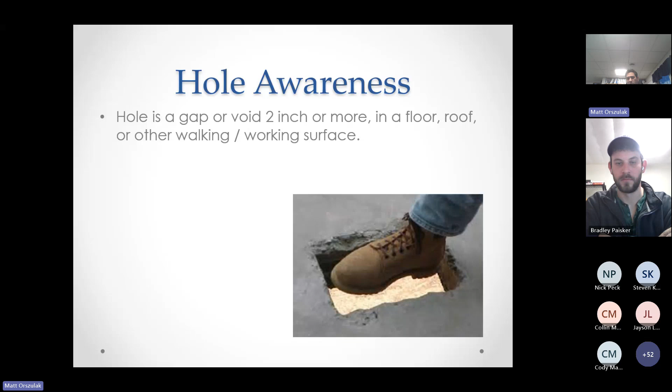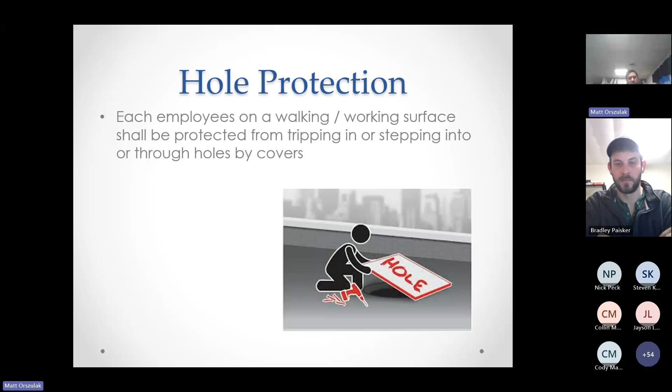So hole protection: each employee on a walking or working surface shall be protected from tripping in or stepping into holes by covers. The easiest thing to do is use a traffic sign, a piece of plywood, some planking, whatever it may be, to protect that hole, and write on it so individuals know there is no hard surface underneath. Usually it's a type of wood that's being used to protect it, and sometimes we use steel plates as well.

Our safe work practices and how we want to cover this moving forward is to cover these things as soon as they're created, clearly identified by spray paint - 'hole' or 'cover' - or it can be verbal if the site is small and can be controlled. But especially if it's a multi-employer job site where there's a lot of different people around, clearly identify in those situations.

Use materials that support twice the weight of the load. We don't want to use really small, random dunnage, say a piece of plywood that's extremely been used and abused and has a lot of cracking in it - we don't want to use that. We want to make sure that it's the right type of lumber that can support twice the load that we might be putting on it.

We want to make sure it's somewhat secure. It doesn't have to be fastened into concrete or anything like that, but it needs to be able to make sure it doesn't easily get moved by anyone walking or moving around it, which could then open up that hole for a potential fall hazard or trip hazard. And again, best line is just that communication with our safe work practices that we just talked about in our JHA.

Each and every morning... We did have a pretty bad incident, probably about 4 years ago, where it was a slab penetration on a control house, I think it was in Barre, where we knew about it. We were just moving the plywood because we had to do some more work inside that penetration, and the individual picked up the 2x4 or the piece of plywood and stepped right in the hole. It was about a 3-foot drop, and created a big knee sprain.

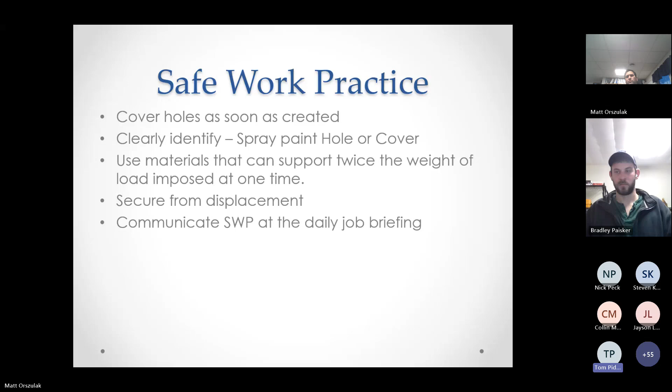The only thing I'd add is even if it's just a trip hazard, alleviate it sooner than later. One place I think about that is the decks on trailers and stuff like that. So if you see a hole in a deck on a trailer, not only is that a DMV issue, but it's also a trip hazard and could be a fall hazard.

Yeah, we're going to be doing a little bit more residential construction. We'll probably have some fall hazards and hole hazards when we do that type of work.

All right, I'm going to switch screens here. Everybody see the meeting? Blow it up a little bit. See that? Yep.

So yeah, safety topic: hazard recognition and protection of open holes.

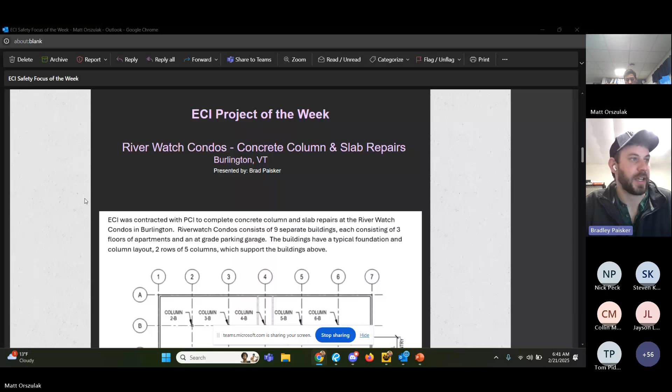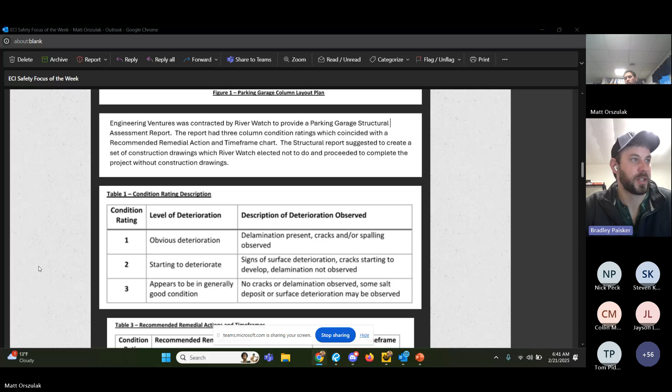Engineering Ventures was contracted by Riverwatch to provide a parking garage structural assessment report. The report had 3 column condition ratings, which coincided with a recommended remedial action and timeframe chart. The structural report suggested creating a set of construction drawings, which Riverwatch elected not to do, and proceeded to complete the project without construction drawings.

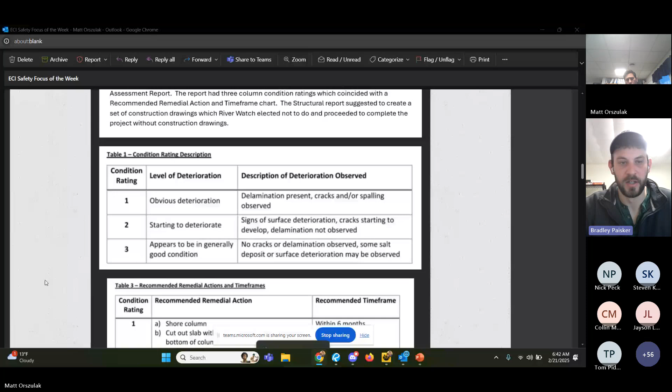The 3 condition ratings were: 1, obvious deterioration, basically spalling, cracked out concrete. Condition 2 was starting to deteriorate, generally cracks or some aggressive salt deterioration at the base of the columns. Number 3 was generally good condition, which just required pressure washing and silane application.

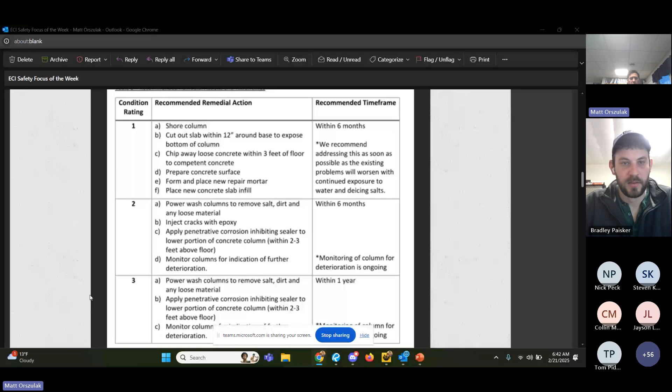Do you want to go through these condition ratings or want me to scroll down? I think we can skip that if somebody wants, it'll be obvious in the next slides what we had.

The project quantity was condition 1: 57 columns, condition 2: 11 columns, condition 3: 9 columns. Condition 1 columns required the most work, including removal of a portion of slab around the column and chipping bad concrete at the column down to rebar.

ECI mobilized in early December to begin repairs in Garage 1 and quickly found the columns had a very narrow rebar cage and subsequently a slender section of concrete left after the Class 1 chipping work. At this time, ECI informed the owner that a shoring system would be required to support the structure during repairs.

The owner engaged Artisan Engineering to do a shoring plan. The columns initially were 10 inches by 14 inches, and the rebar had 2 inches or more of cover, so it really didn't leave much concrete after we chipped.

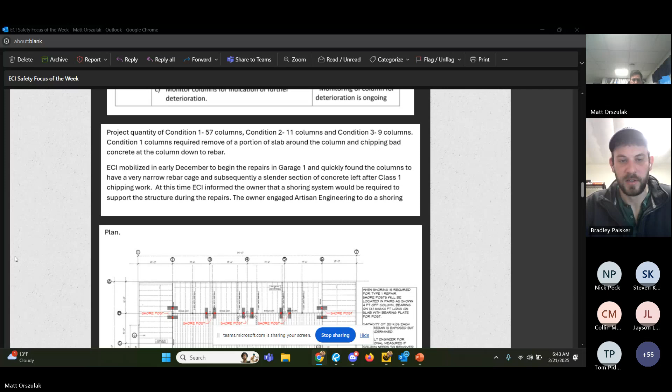This is the shoring plan that Artisan gave us, basically a shoring column resting on 4 6x6s, supporting the structural beams that were inside the sheetrock ceiling.

This is the repair detail that Artisan also provided, including some 2-inch expanded rigid insulation for frost protection. Then we infilled with the Sika Quick that I'll go over in a minute.

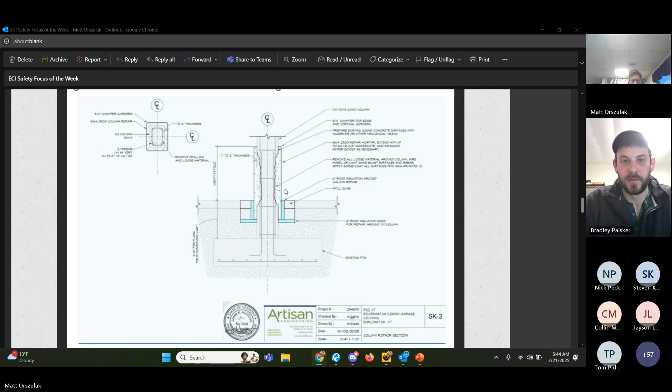ECI rented aluminum shoring posts and followed the plan for the shoring system. Unfortunately for the owner, this nearly doubled the cost of the project. However, given the high risk to ECI's employees, building residents, and the buildings themselves, we made the right decision. Credit to the crew for recognizing the extreme hazard and differing conditions in a timely fashion.

The general sequence of work included identifying how high the column needed to be repaired, saw cutting the slabs and column, hand excavating the subgrade to depth, chipping bad concrete down to the rebar cage, cleaning up the rebar, applying a corrosion inhibiting bonding agent, forming the column overpour, pouring the repair material, which was a bagged Sika Quick 2500 with 3/8 stone, stripping the forms, and finally pouring the slabs with the same repair materials.

A major factor of the work was scheduling residents to vacate the garages in a timely manner and creating an overlap between garages to keep a steady workflow between activities while having a warm location to temper substrates and materials. A hybrid crew of heavy civil, rail, and concrete workers all worked together to tackle this project.

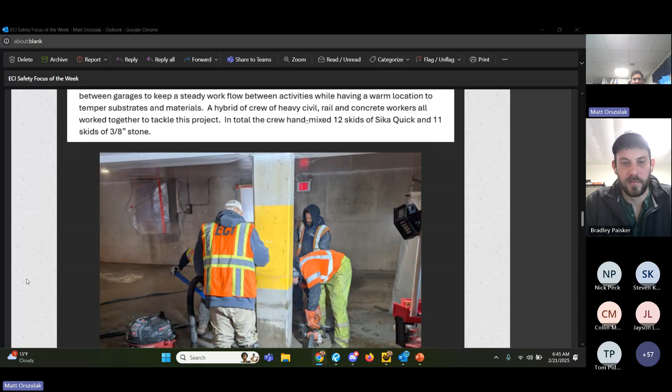In total, the crew hand mixed 12 skids of Sika Quick and 11 skids of 3/8 stone. It's a lot of mixing by hand. It is. The pours were relatively small, so bringing in a mixer truck with a minimum of 3 yards or so just really didn't make sense.

Here the guys are saw cutting the slab out. We did an 11-inch wide slab cut to expose the bottom of the column that was buried beneath the slab, and then a horizontal cut on the column to provide a nice tie-in with the new materials.

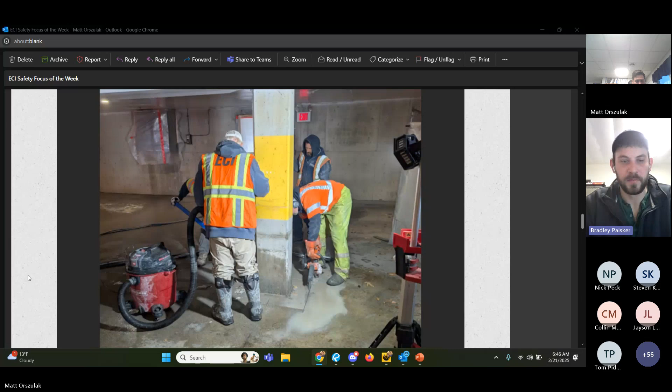This is after chipping and hand excavating. You can see how slender the columns really get. With our shoring posts in, they provided a good backup and safety factor while we chip these out.

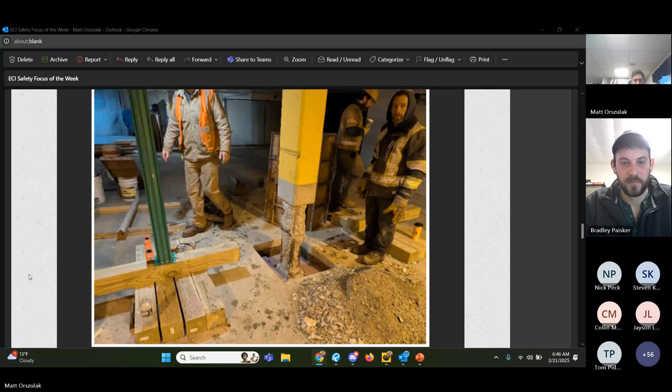Here's the garage. We poly'd off the entranceway so we could put a flameless heater in there and temper everything. And here, that's Troy vibrating one of the column pours. We use typical forms, just Symons forms, so we didn't have to custom form everything. We could strip off one side and pop the form onto the next column.

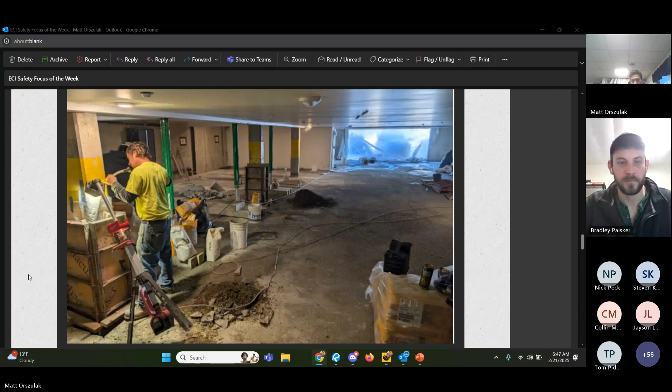Here's one after it's been poured. You can see in the background, there's another column getting ready to have forms put on. Basically, we would form up all the columns and then just move from one column to the next with materials, keeping a good steady pour going.

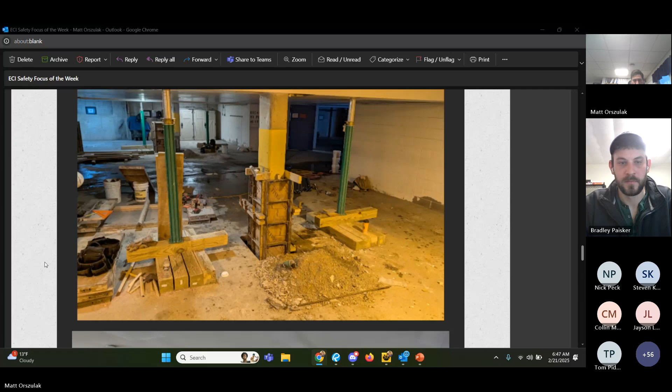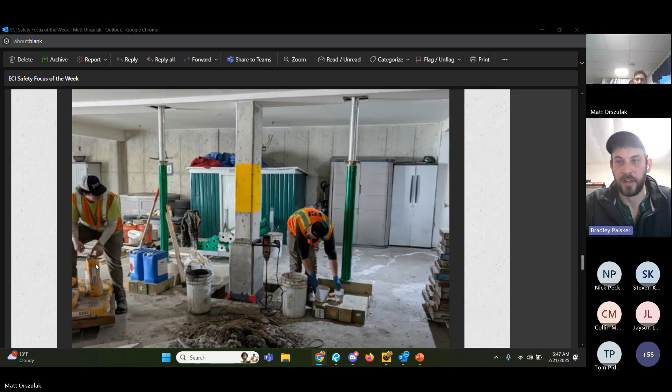This is a column that's already been poured and the guys are getting ready to pour the slabs in. We put a small rebar detail in the slabs to prevent cracking on that small section. And we put a half-inch expanded foam around the base of the column to provide a bond breaker in case of any freeze-thaw action.

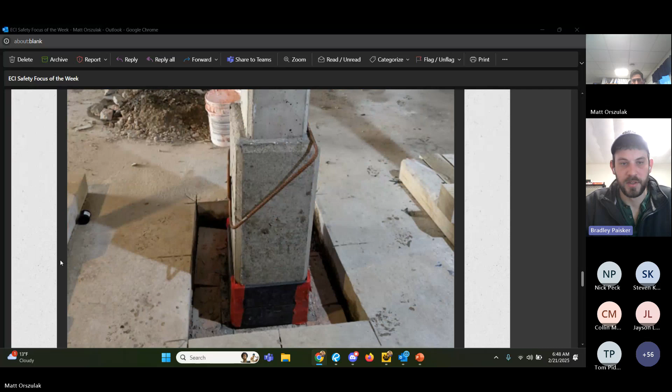Here's another column getting ready for the slab infill. And that's the final product with a little Sikaflex self-leveling sealant around the bottom to keep the water from penetrating down.

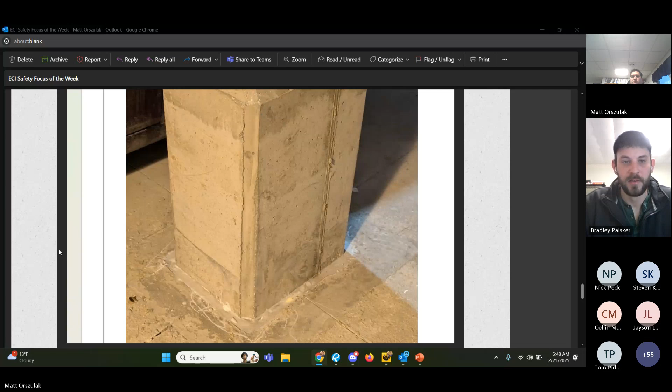Nice, chamfered all the verticals and all the horizontals to prevent cars from hitting it and chipping it out.

I'll note that they hired somebody else to do this. I don't know who, I don't really know what happened. But they had done a handful of columns, and theirs didn't come out very well. They were all cracked, they didn't chamfer them, they were not square or plumb, so I don't know what happened there. But that's how we got retained after something fell through with the other contractor. Yeah, I think ours came out well.

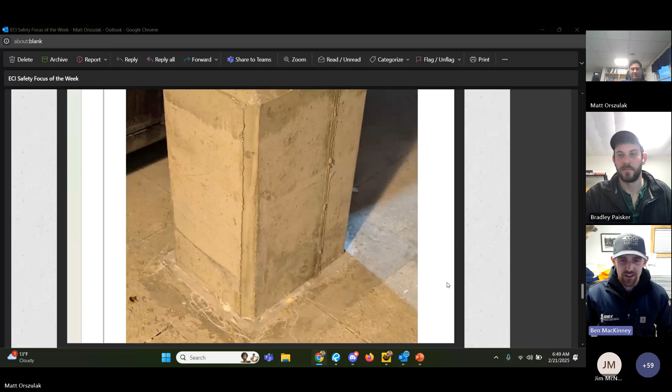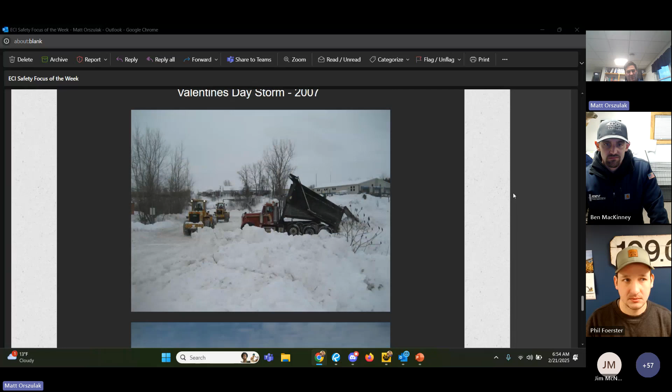Jim, remember the Valentine's Day storm from 2007? Yes, unfortunately that was a doozy. Look at that, how many inches? We even had to hire trucks. This is out back, this is our filling pile, up our pond, dewatering pond or snow pond now. Look how high that bank is, that is some snow. For sure, probably Ricky up there, somebody.

Well, we had quite a good storm. Thanks everybody that put in the hours on Sunday to meet our clients' requirements on sidewalks and snow removal. I know everybody put in a lot of hours early this week, so good job driving, and really, knock on wood, we haven't done much damage during plowing so far. So let's keep up the good work, and keep paying attention when you're backing up.

Well, just trying to give you guys a shout out. I was thinking the other morning, let's not let it go to your head, let's not let it blow up your ego. Let's stay humble and stay focused.